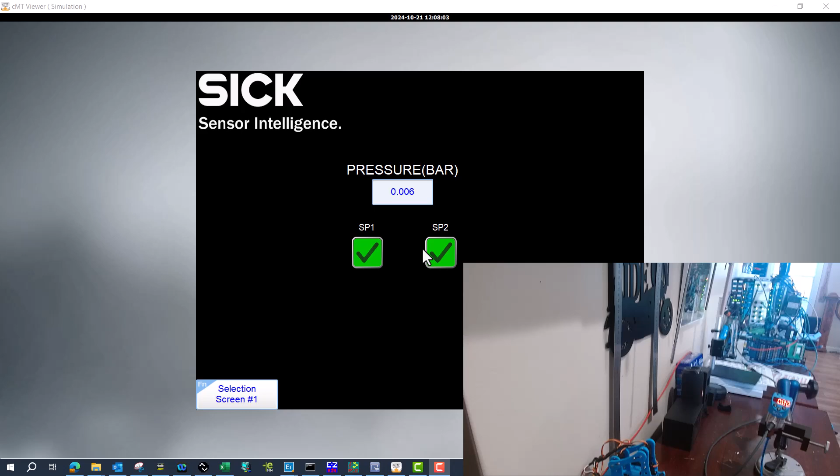So the first thing that we need to do is come into the SIG350. Once you know the IP address, you just type it in. And so I know port 2, I wanted it to be a digital output. I went ahead and turned that on. Now, if you have a PLC connection like I do now, you won't be able to make any changes until you unplug that network connection from the PLC, and then you can change these to digital out and then plug it back in, and it'll save those changes.

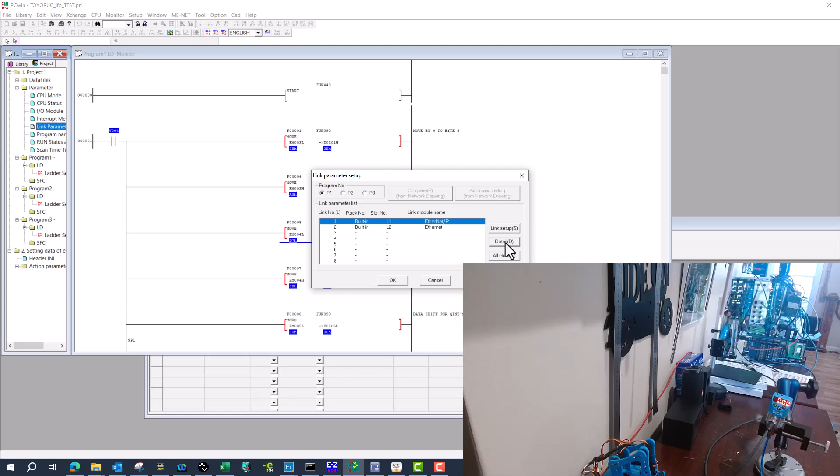So once you have that, then we just have to know the PLC mapping. So I've already set this up in my PLC for Ethernet IP connection to my SIG, set up as originator. I came in and I said 192.168.1.123. I put my instance ID in, and then my size as far as how many bytes.

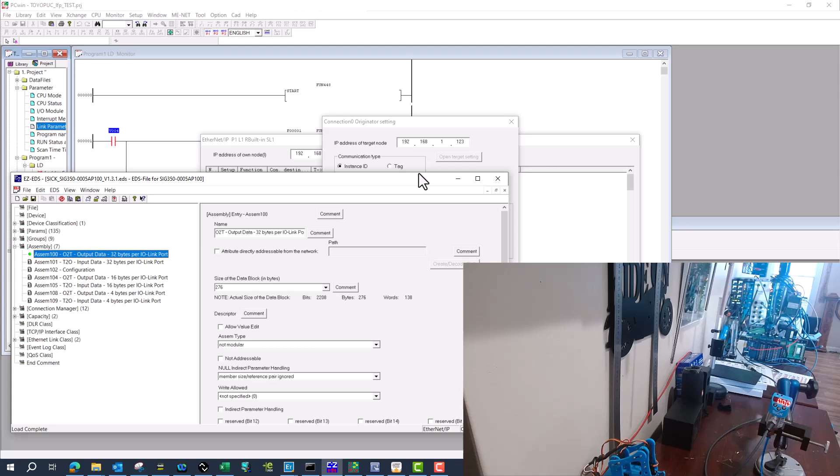Since Toyopuc won't take an EDS file, you can get something like EZ-EDS and determine how many bytes of data you'll be getting per instance size. This is a free software as well if you really need to dig into the IODD file or the EDS file. So now that you've got that, you can also find the data size in the manual of the SIG350.

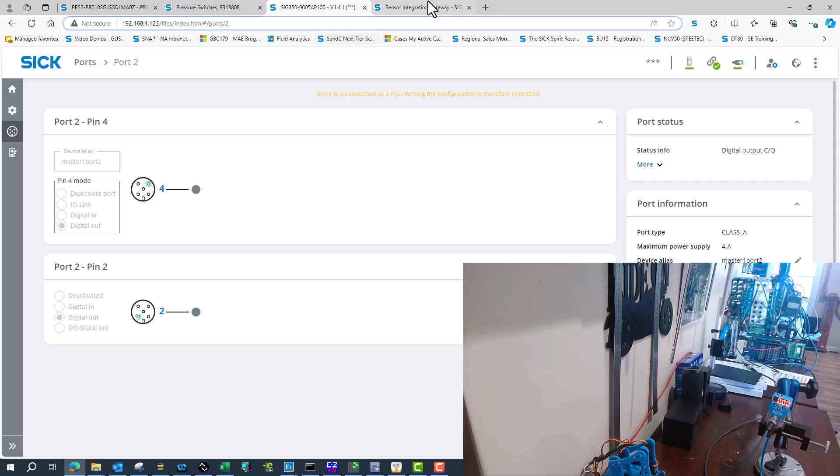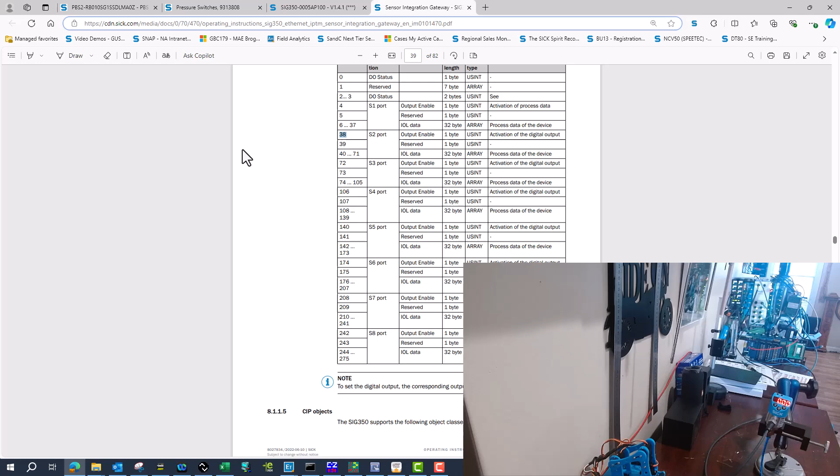So if I look here, output size, I can see 275, but since I'm counting the 0 byte, that's actually 276. So that's the PLC mapping of everything and how I got my instance sizes and where the data is going to. So now that we've got that, then you can come see I've just kind of labeled everything. Since the PBS comes over as a float, you can see that here.

So if you come to the sensor, you type in a 7-digit part number, you can either just grab this PDF, which will show you the layout of the IODD file, or if you've got an IODD viewer, something similar to what I have here, then it'll come out cleaner as well.

But since I just need to know how the data is laid out, I'll come here and it says that my byte 0 through 3 is going to be my pressure, which is in a 32-bit float. And then I've got Q1 or SP1 and SP2 in the 4th byte, and that's coming out of that sensor. So we know how many bytes of data the sensor is spitting out. Then we just have to understand where the data is landing.

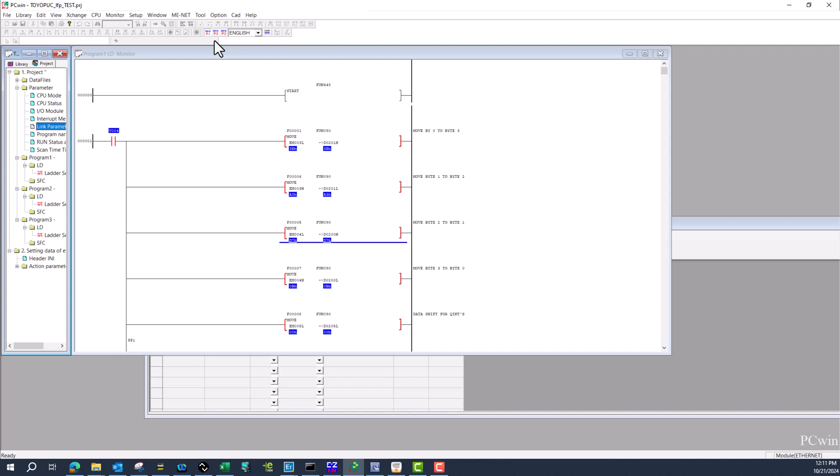So if I come to my input assembly here, you'll see that starting on byte 4 is where my IO-Link data starts to come in. So since I'm starting with my PLC at EM0, which you can see here, and I go to EM0L, and I start to monitor, and we said it starts coming in on the 4th byte.

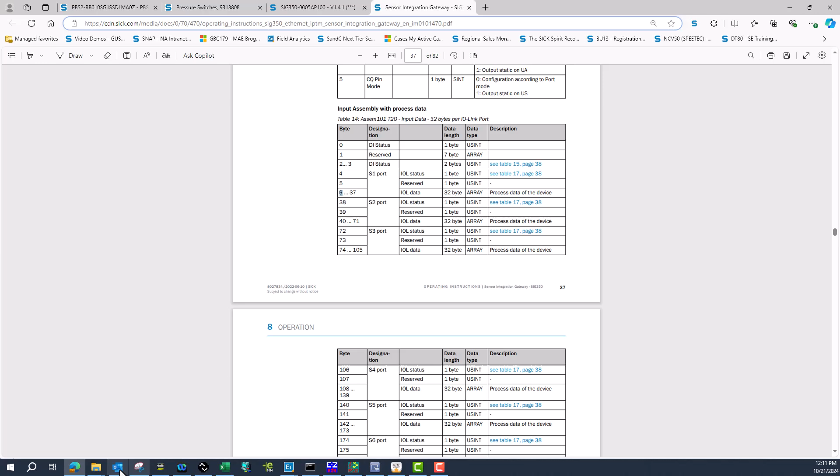So IO-Link data, IO-Link status, it starts on byte 6. So we'll come back here, and I can just verify byte 0, 1, 2, 3, 4, 5, 6. This is where my data start to come in. You see them 32-bit floats. So those 4 bytes are where I'm going to get my pressure reading.

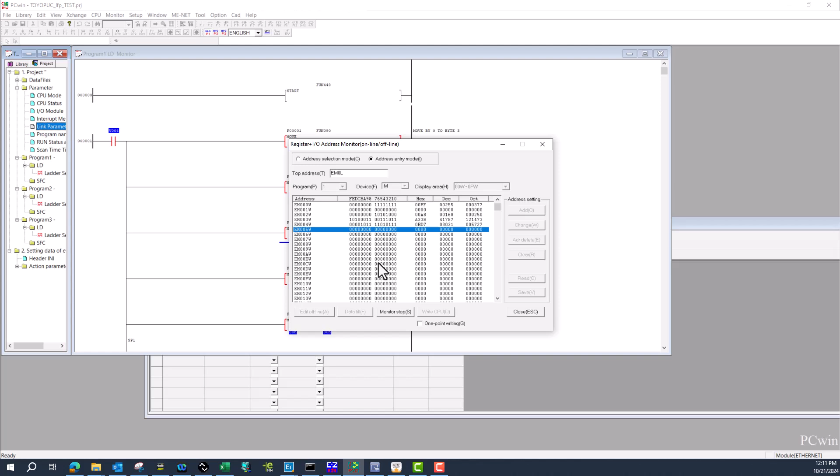But you'll see SP1 and 2 will be down here. As I push it, you'll see those 2 come on. So that's the SP1 and 2 coming in on the 7th byte, or 6, 7, 8, 9, 10. So the 10th byte that are coming in. So now that we've got that information, we know where it's coming.

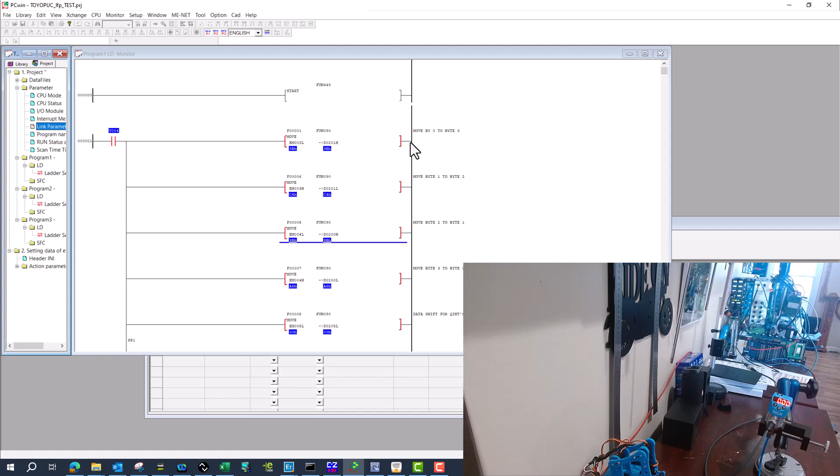Since it's IO-Link data, it has to be byte swapped, and since it's a 32-bit, it has to be byte swapped and word swapped. The easiest way to look at this, we just need to change the order. So you can see I'm taking EM3, the low byte, to 201H, or the high byte, and so I'm pushing all the data from EM003 low byte to EM004 of the high byte. But I'm starting at 200 and then going to 201.

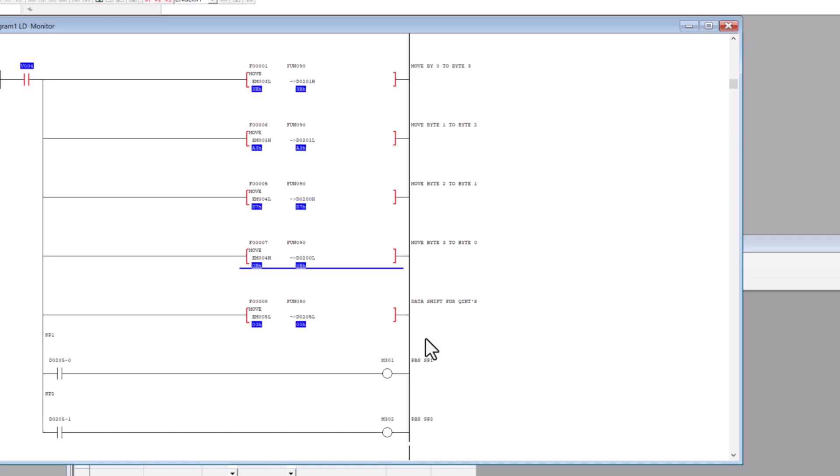So if you look here, you can see I started 0, 1, 2, 3, and here going to 0, 1, 2, 3. So all I'm doing is rearranging that data so that I get usable data in a pressure range. And then for the SP1 and 2, I did the same thing. I took EM005 that we just looked at, pushed it into 205, and that way I can just get my M bits. So that gives them on or off depending on what the set points are.

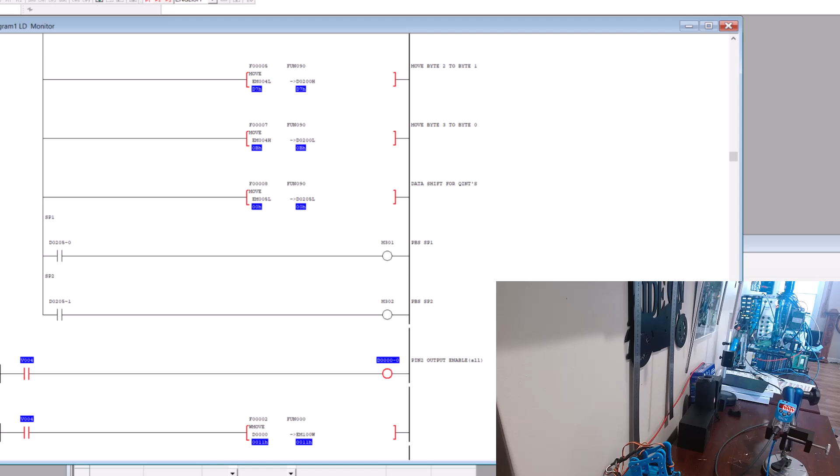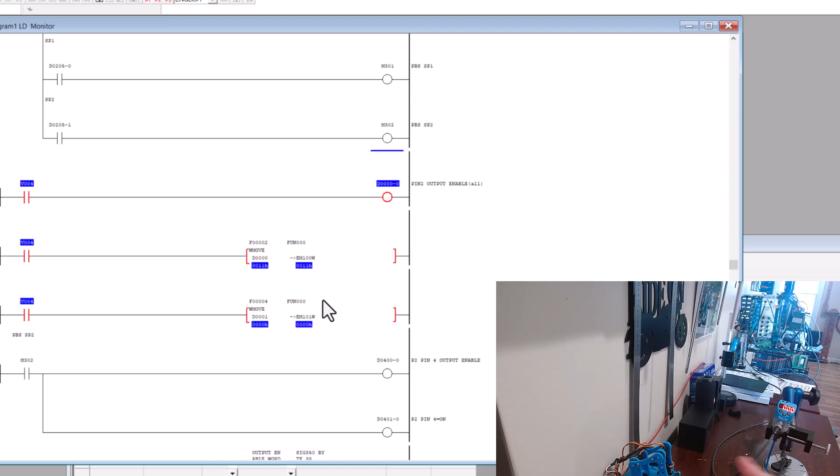Then the next thing I wanted to do, since I've already got the data coming in here, as you can see, is I want to turn a light on when I hit SP1 or SP2, right? Either on pin 2 or pin 4 of the SIG350. So what I did then is I came down to move the data from where I wanted to go, and then move that into starting at EM100.

So if I come back to the manual and I come to output assembly, I can see that my DO status starts here, so I have to do an enable, and then once I enable the pins, then I have to start turning them on and off. So that's what I did, starting at byte 0. So you have an enable bit. So the 0 bit on byte 0 is going to be my enable.

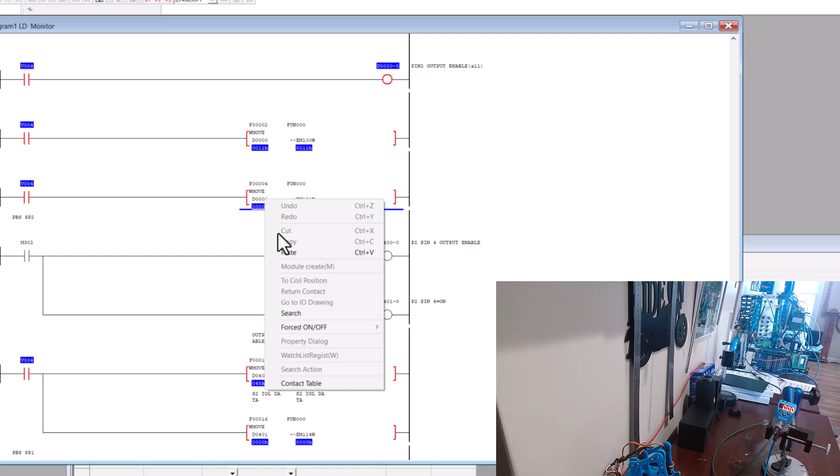And then to turn those on, I'll need to go to, you see, D01. See my coil here, and I'm actually turning that on, right? So number 3, since I want port 2 to be turned on, I go to the third bit, or bit 3. If I wanted to do port 1, then it would be D1-1, or port 3 would be D1-5, right? So it's every other bit for that entire word of data that enables that to come on and turn that light on and off.

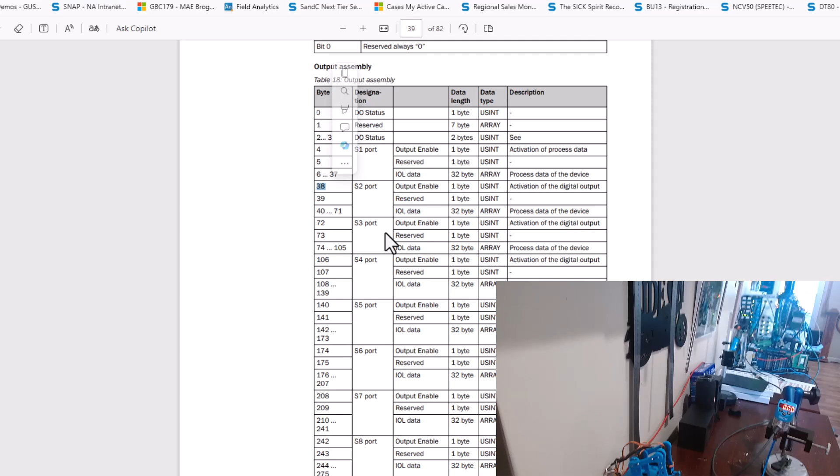If I want to do the other pin, so I want to do pin 4, then I would do pretty much the same thing, but since it's port related, I'd come to the 38th byte. So what I did is I divided that by 2, and I got 19, and I added that to EM100. But one thing to remember in Toyopuc that messed me up is I forgot that this all counts in hexadecimal. So even though I'm going to 19, I don't need to go to 119. It needs to go to 113 because it is the 38th byte in that array of data, right?

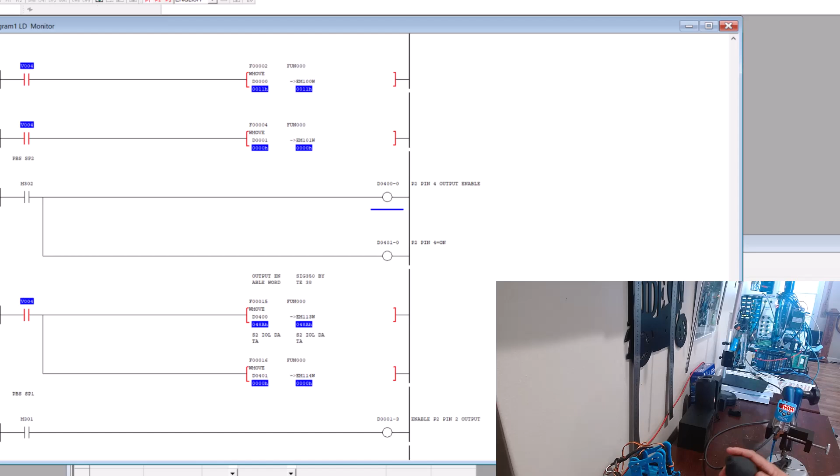So I just take, let's say D400, and I turn my enable on, same thing, and then the next word of data is where the on will be. So I enable it, and then I turn it on. And that's it. That's how you take the PBS, put it to a SIG350, bring the IO-Link data into Toyopuc PLC, and then from the Toyopuc PLC, send data out to the SIG350 and turn a light on or off on pin 2 or pin 4.